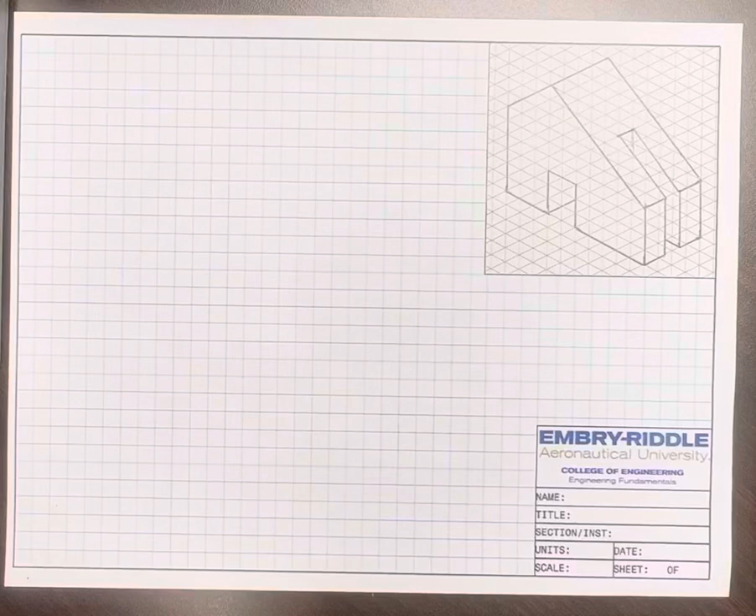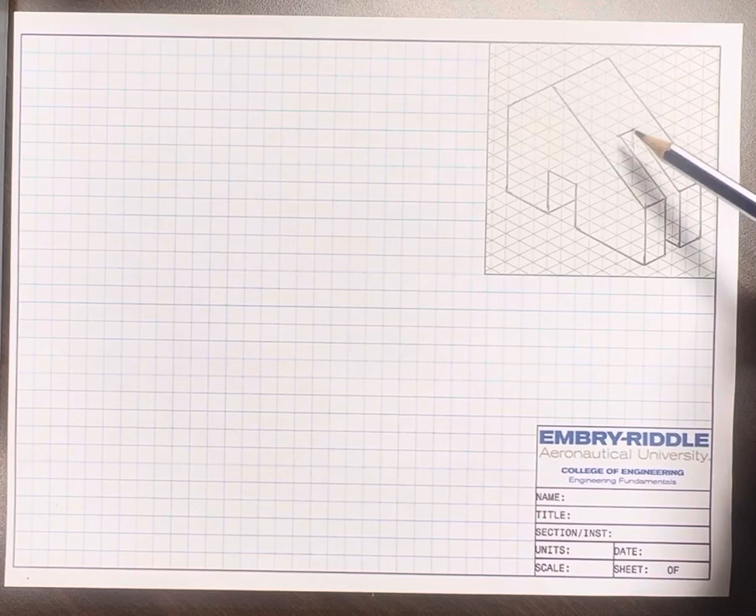Okay, I want to create the orthographic views for this object that's in the isometric, but I also want to include an auxiliary view so that we can dimension this object here. I'm gonna start by plotting out the vertices of my front view. So I'm gonna give myself 4 spaces for dimensions, place my vertex here, and then I've got 1, 2, 3, 4, 5, 6 units up.

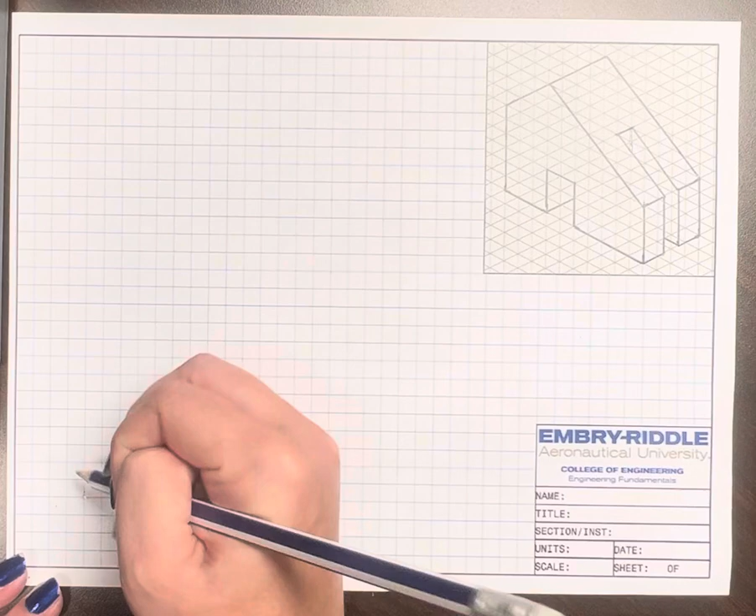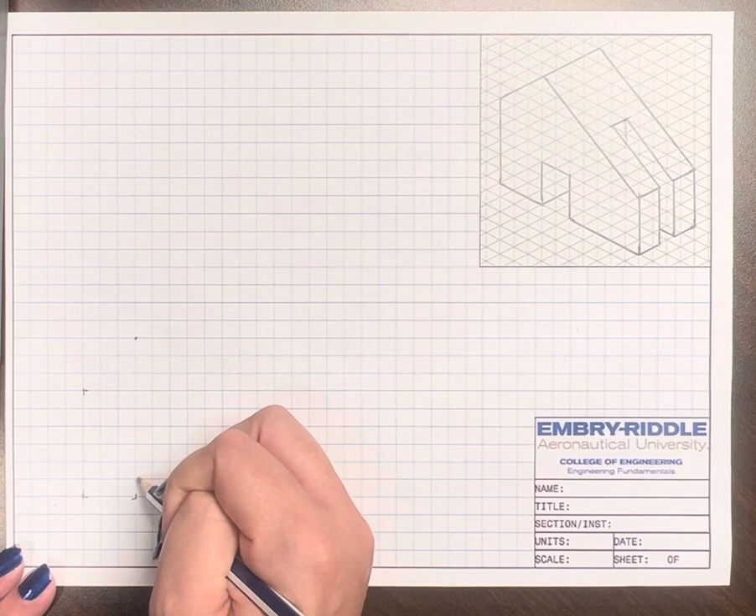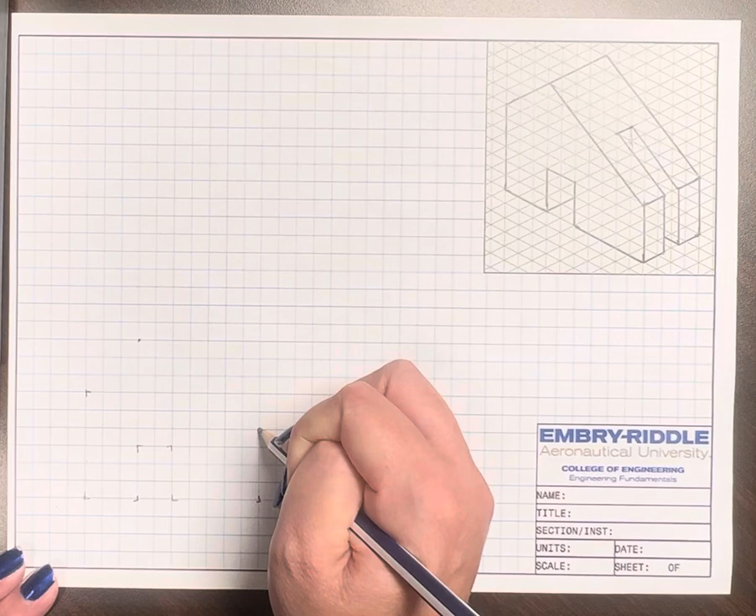And then over 3 and up 3. And then from the base over 3 to a void that goes up 3, over 2, back down, over 5, and then up 1, 2, 3, 4. So I'm going to connect the dots there to get my outer bounds.

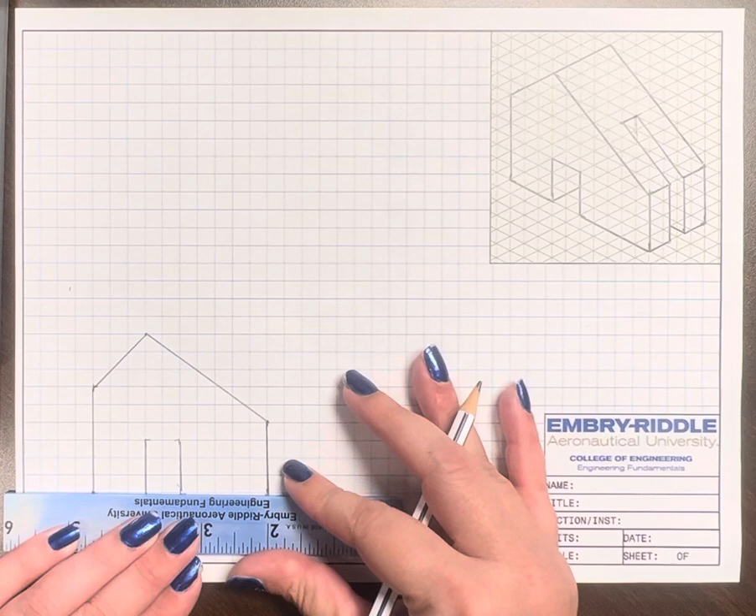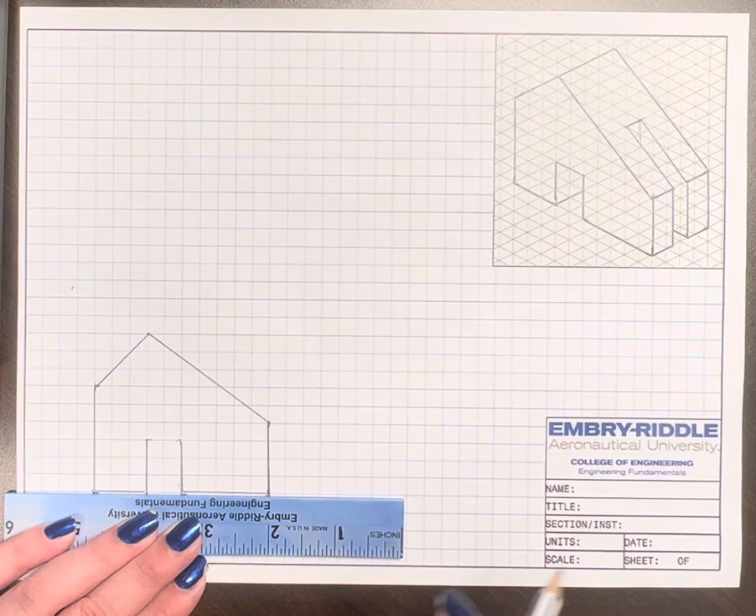So now for my auxiliary view, I'm going to do it off of this incline so that I can show this feature. So I want to give myself enough space between my different adjacent views to have my auxiliary view there in the middle. So I'm going to go ahead and leave 8 spaces. So 1, 2, 3, 4, 5, 6, 7, 8. And then a depth here of 4.

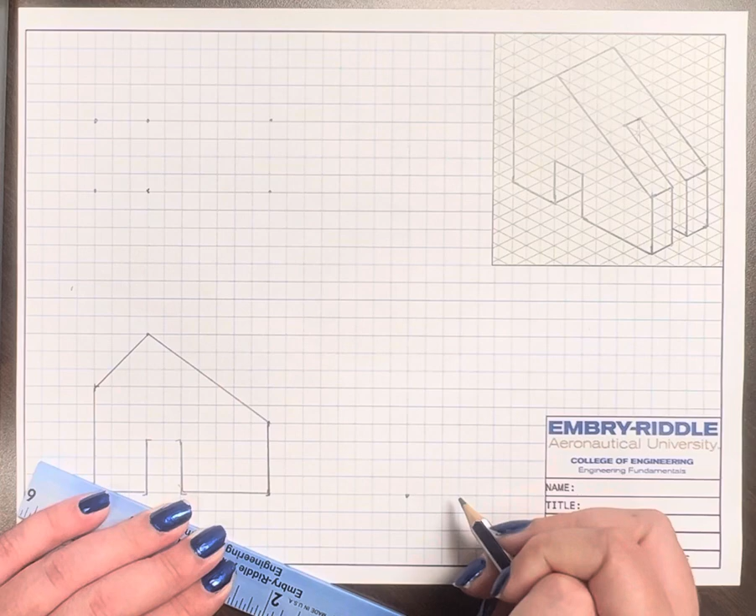Making sure that my points are all in alignment. I'm going to do the same thing on the right side, so 8 over. And then a width or a depth of 4. Align my features.

All right, let's do a double check there. So these guys line up, those line up, and those line up. Across here, these line up, these line up. Whoops. Now these line up and the top one does too. I forgot this guy right here.

So I'll go ahead and start on my right side. Draw my verticals, my horizontal visible lines. This one's going to be visible. And then we have a void going on in the middle. So here is 1.5 over from each side. So 1.5 from each side.

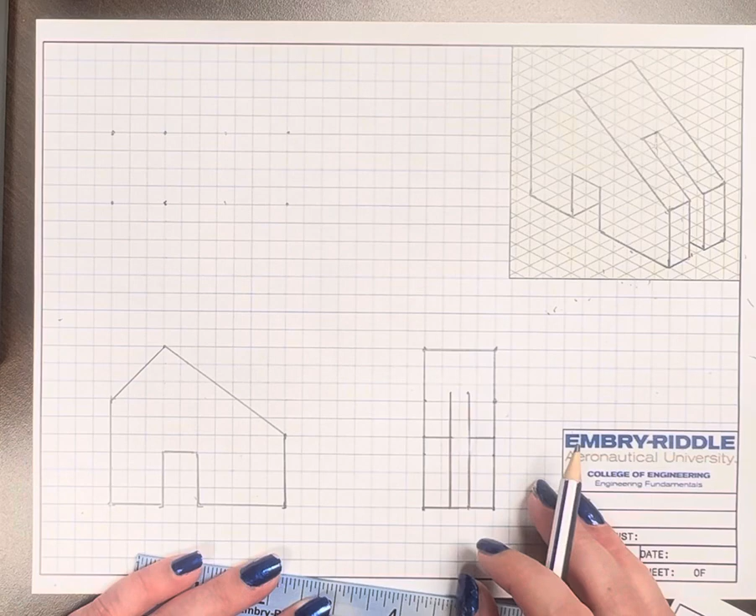So while these edges will be visible lines, we won't actually technically see this right here. We will see a visible line here because the back doesn't have a cut through there. All right, we'll come back for some of those hidden lines in a minute. Let's go to the top and do our visible lines.

So our two edges and our peak here, and then we'll have other features of this one right here. That's going to be a hidden line underneath this visible line, so it won't show up. Our other one is going to be here. This one's going to be a hidden line for this doorway here. And then we have our void in the middle here, so that's going to go up 3.5 to get to that halfway point. And it's 1.5 up from each side.

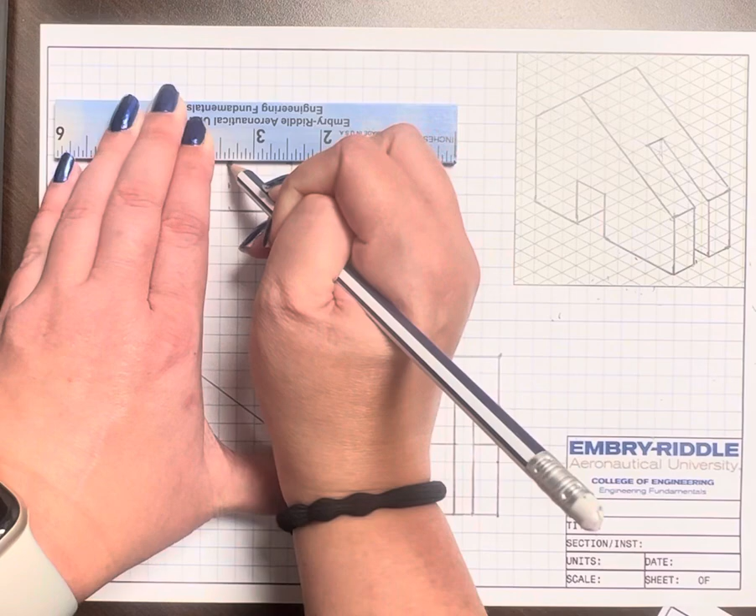So those are going to be all visible lines for this face here, but we won't actually have a visible line here because that void is there. Okay, so now we have our main void here, the hidden line's there. Here, our hidden line for this one is going to be across here. Now it may actually show up as a visible edge.

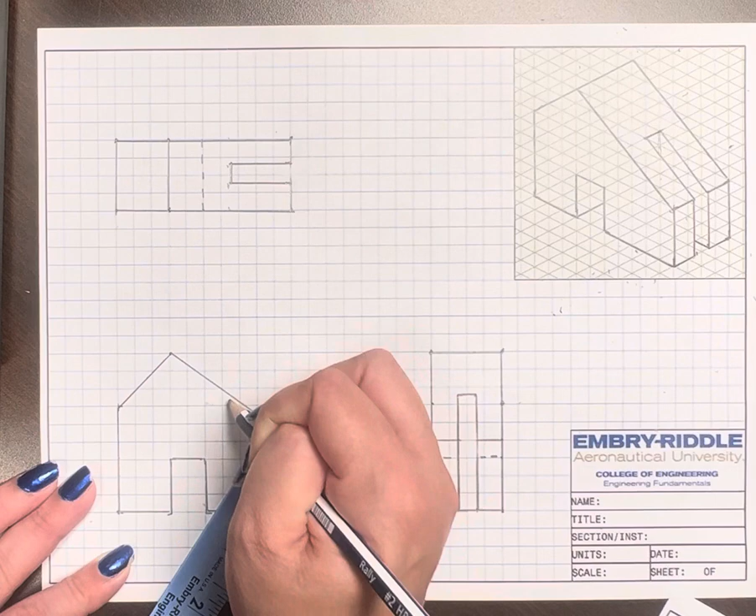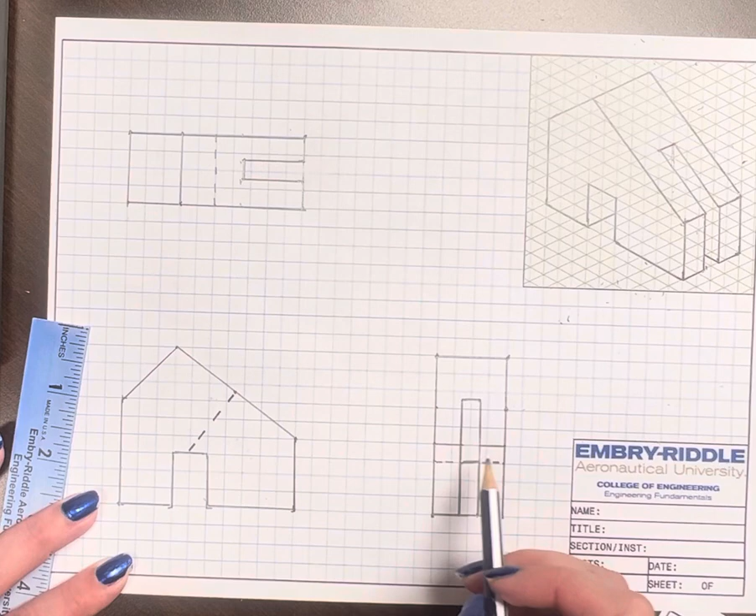As a hidden line. So then we will see this edge for just this half of it. So this will be a visible line. Now here, that's our line there. But we will have this peak back here that'll show up as a hidden line going all the way across.

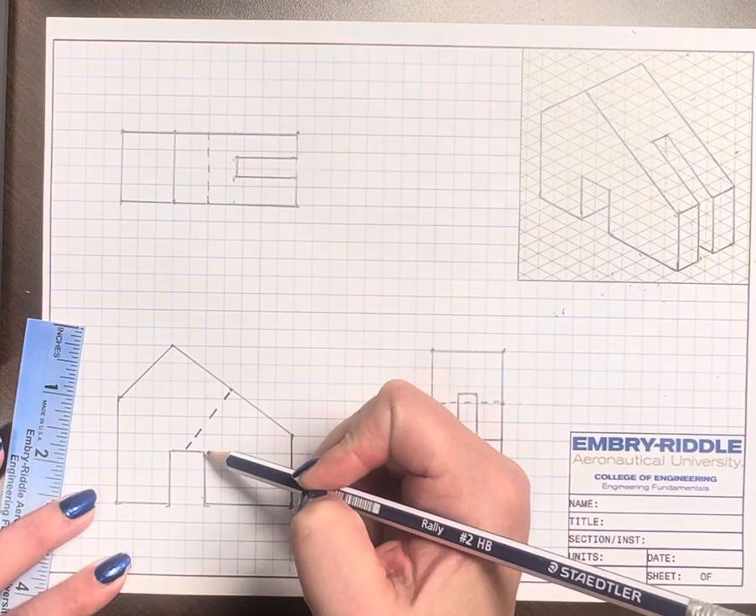Okay, so now let's return to the top view here. We have these features that show up as a hidden line, but now we have this feature that we need to include. So it's going to go all the way back to this halfway point. We will have a hidden line going all the way across where this void cut stops. So all of this is going to be a void in the middle here. And then where that cut goes from here to here, it'll also be a hidden line.

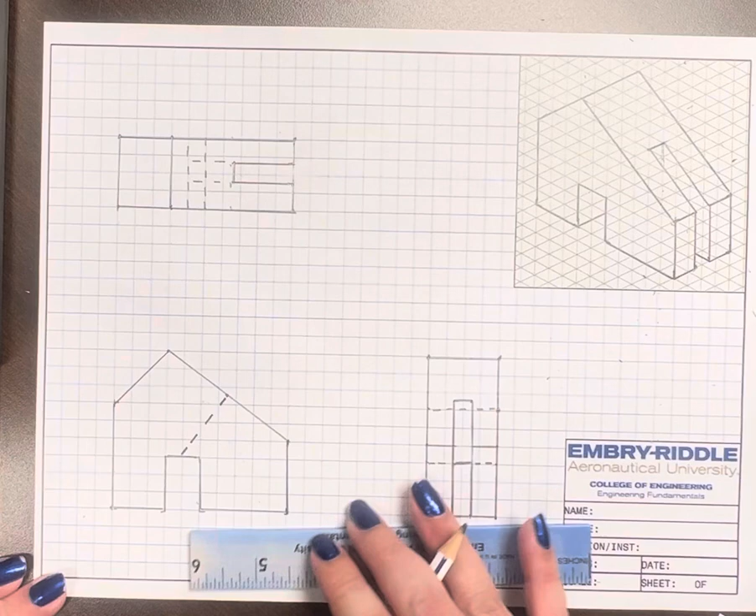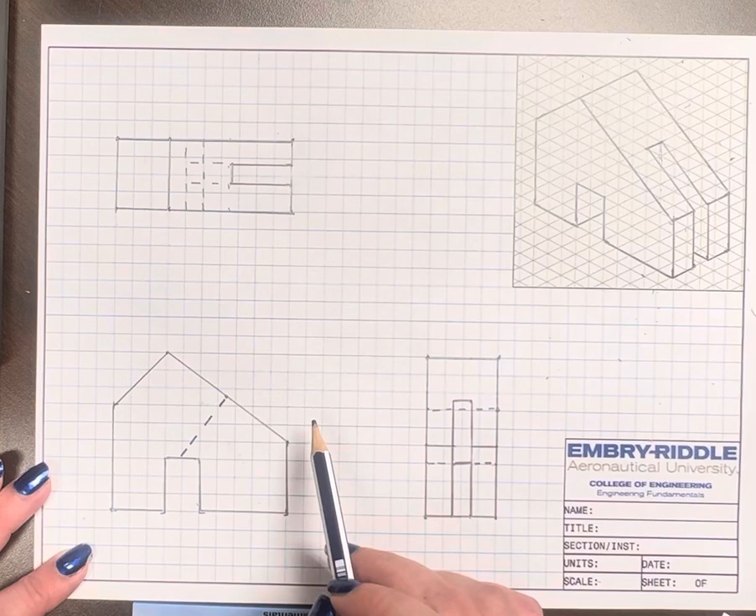All right, so let's do a real quick check. Make sure all of our features have been associated to each of the views. So here we have this one, hidden line under the visible, hidden line, regular. Here we have it as visible and hidden on the other two sides outside the void. We do have this edge in the back showing, this roof peak showing as a hidden line, and then this void in the middle here showing as a hidden line. So we have all of our features now, so that's great.

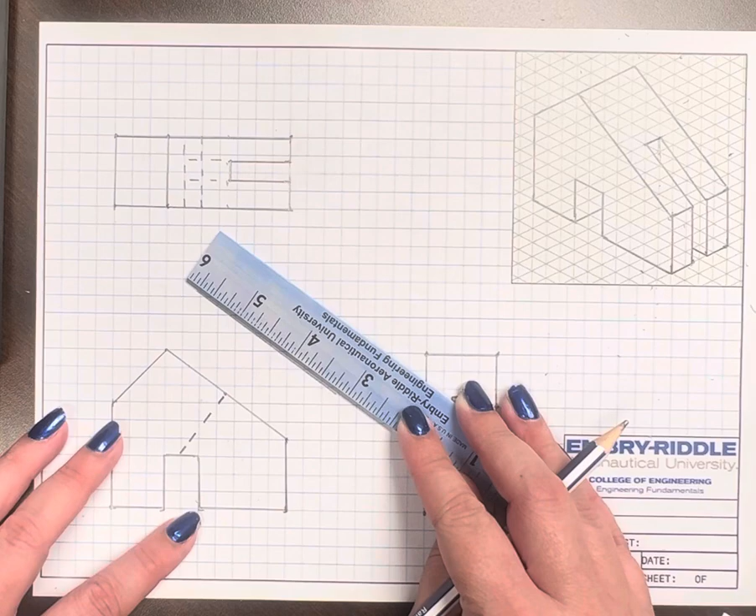So let's go ahead and add an auxiliary view. So I'm going to make a folding plane line that is parallel to my incline, and then follow that up with a view of what is going to be kind of an intermediary between my top and my side here, that's going to show my depth in true dimensions.

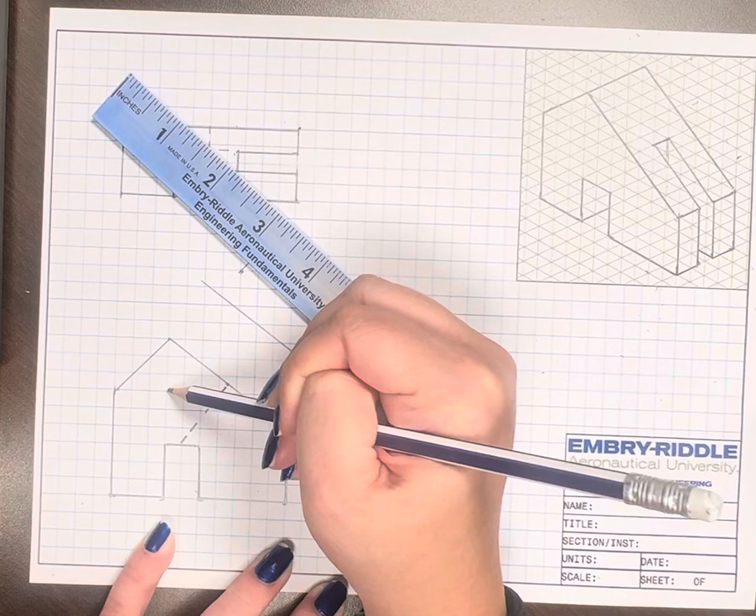To make this parallel, I'm going to go from this corner, go down 1, 2, 3, 4, 5, and then over 1, 2, 3, 4, 5, 6, 7. We should be right here. My line's a little off, so let me fix that. Make sure I'll have, and then for depth here it is 1 inch, but then we're scaling it, so, but based off of the dimensions being the same here, I can go 1 inch up.

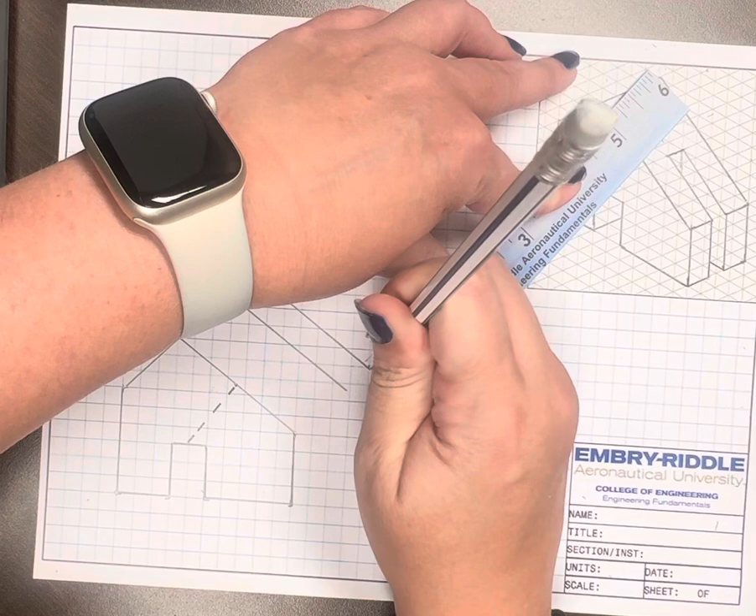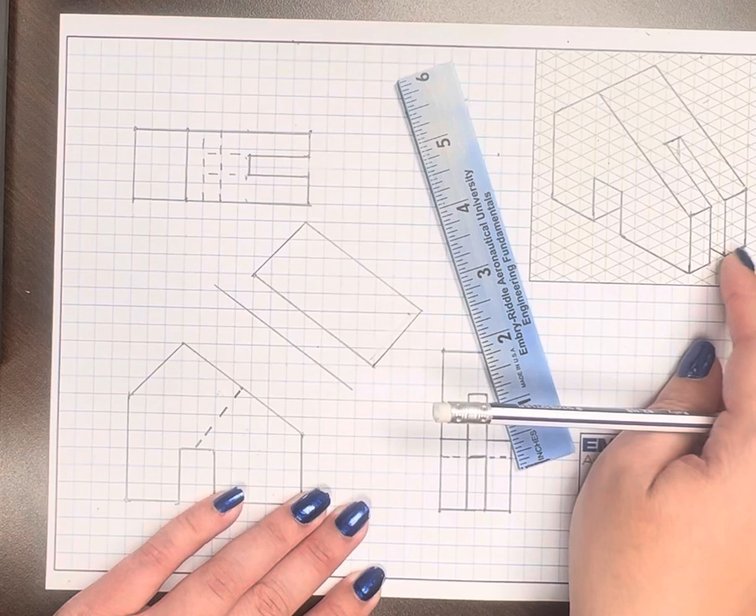And along those parallel lines again. So then this one's going to be a little harder to get the measurements for. It was 1.5 units over. So if you look at that in terms of inches, that would be taking your inch, dividing it into fourths. So it would be 1 and then 1/2, so it would be 1/4 and then 1, so we got 1/8. So 3/8.

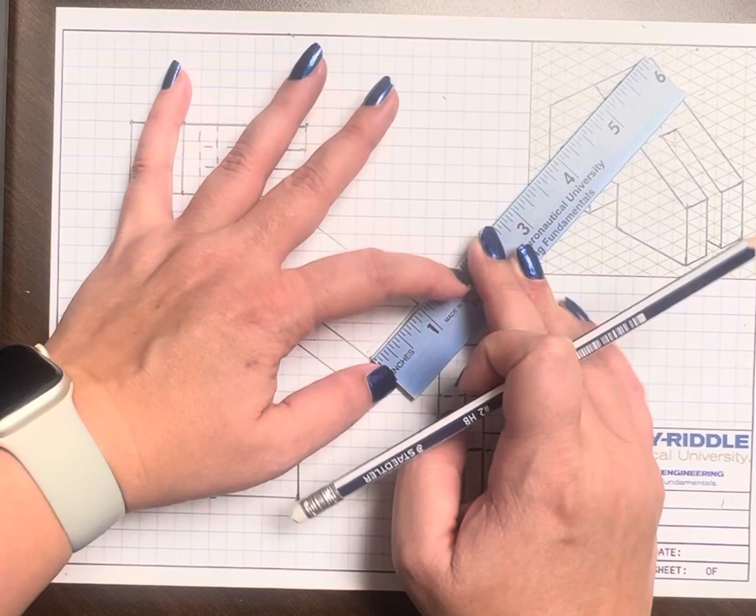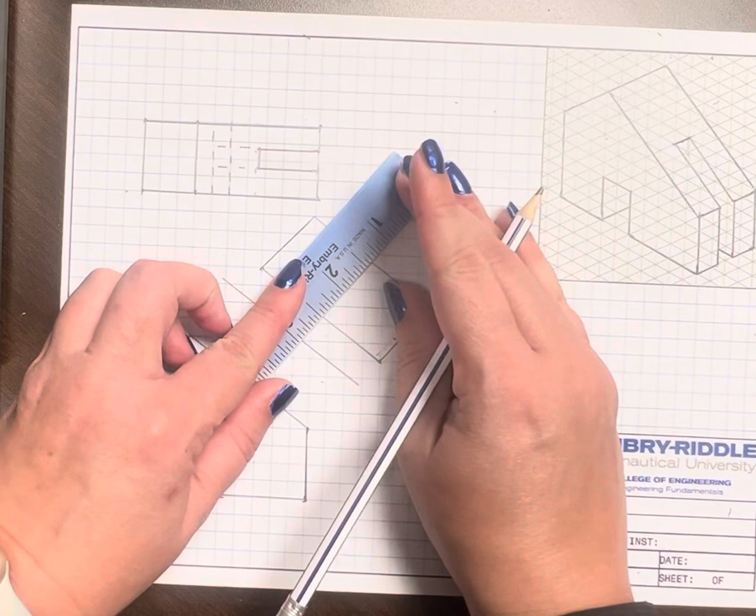And then halfway up this object, which we're looking at 2 1/4, so it would be 1 1/8 to get to our feature in the middle here. So again, if I was doing the dimension on this, this is 1 1/8, so that would be times 4 to get me into that quarter scale. So that would be 4 1/2 in terms of the dimension.

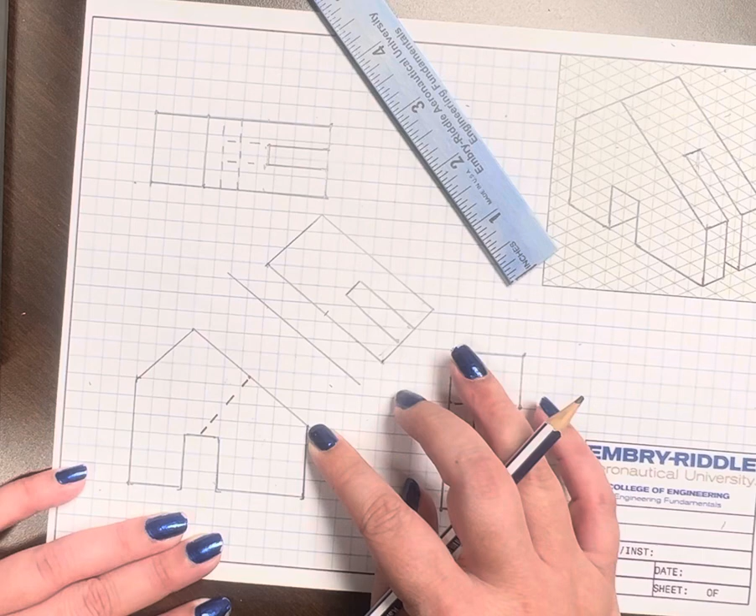So remember that when you're doing a partial auxiliary view, you're just showing what's going on at the top surface. You're not showing anything going on in the background or hidden lines. That's a full auxiliary view. So we just did a partial here. And technically my folding line should be halfway between here. So I'm going to go ahead and just clean that up a little bit just to make sure that that is clear, a little more like that.

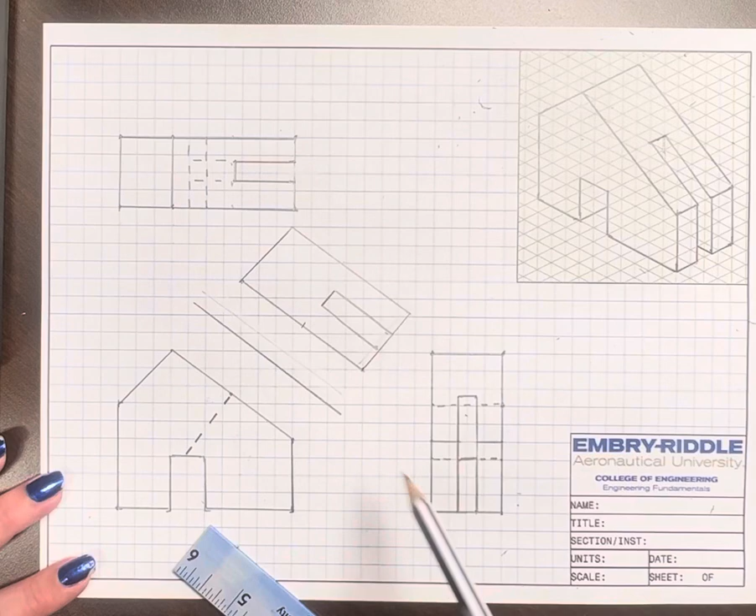And so that gives us our fully drawn out orthographics with auxiliary view. Remember, when you're doing the dimensions, this is key for what we want to dimension on this drawing in terms of our auxiliary view. So don't do the foreshortened surfaces. Just dimension them as the true value on your auxiliary.